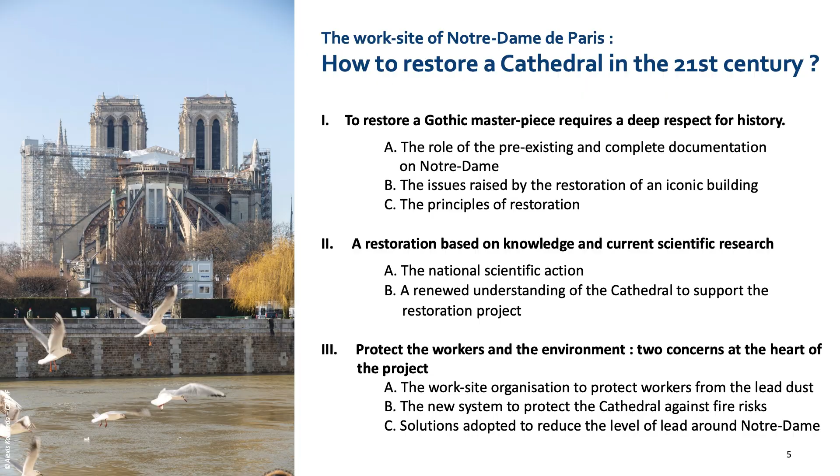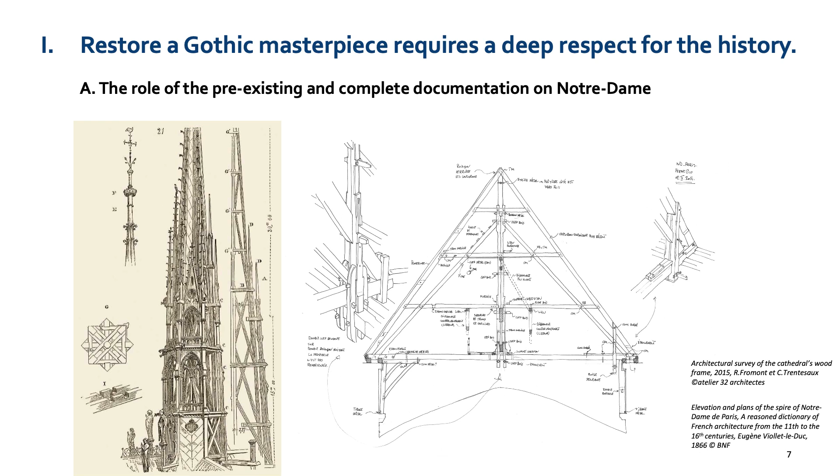First, I will explain that restoring a Gothic masterpiece requires a deep respect for the history. 4 years before the fire, 2 young architects decided to realize a study about the old wooden structure of Notre Dame. Every part of the structure, as you can see in the picture, even the spire, was described by this team. That's why all the structure is very well known.

Actually, before the fire, Notre Dame was one of the most visited monuments in Europe, with 12 million visitors a year. Why? Because, as the Council of France said at the beginning of the conference, Notre Dame is a very important example of Gothic architecture, one of the oldest Gothic cathedrals, a place where unknown architects decided to improve the technical way to build a house for God. Also, Notre Dame is a national cathedral in France, a place where French history was made.

That's why it was possible and necessary to restore the cathedral as she was before the fire. In a few words, let me talk about the principle of restoration.

First, the project aimed to restore the spire and the roof of the central part of the building as it was designed by Viollet-le-Duc. We will use dry wood and lead to realize this structure, and it's a real challenge, because Viollet-le-Duc, the architect of the 19th century, designed a very complex structure which was able to resist stormy weather, for example.

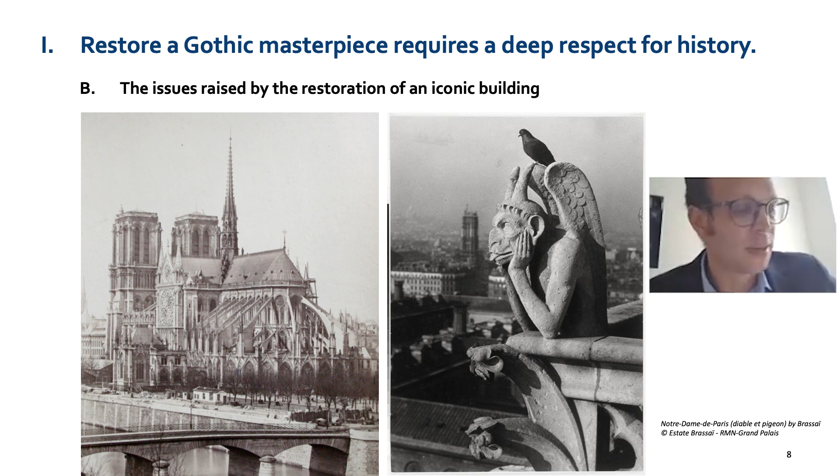This is also a real challenge to rebuild the spire because the spire is also an artistic item with a lot of copper and lead sculpture. The project also aims to restore the Gothic roof in wood and lead. The Gothic roof was installed above the nave and the choir. In this part of the cathedral, we will avoid rebuilding the wood frame realized after the medieval period, because we are looking to simplify the design of this part of the roof.

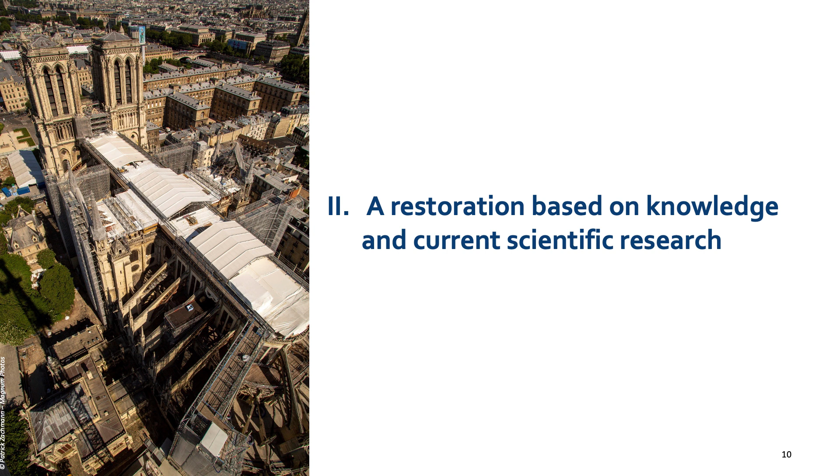A historical building has to be linked with some scientific studies. And we have a real chance in Notre Dame because we have a specific project, the National Scientific Action. The fire

turned a new page in the history of the cathedral. And it was the beginning of a privileged moment for the observation and study of the monument, which is now a site of global and holistic studies.

That's why a national scientific action coordinated by the Ministry of Culture was launched in 2019. This national scientific action considers recovering the knowledge about the architectural elements and materials before the fire, extracting and saving the scientific information contained in the remains, but also coupling modeling systems for geometric, structural, and acoustic studies.

The scientific action comprised 157 research staff from 50 research units organized around 8 working groups. We have working groups about wood, but also about metal, stone, glass, structure, acoustic, heritage, emotion, and digital data.

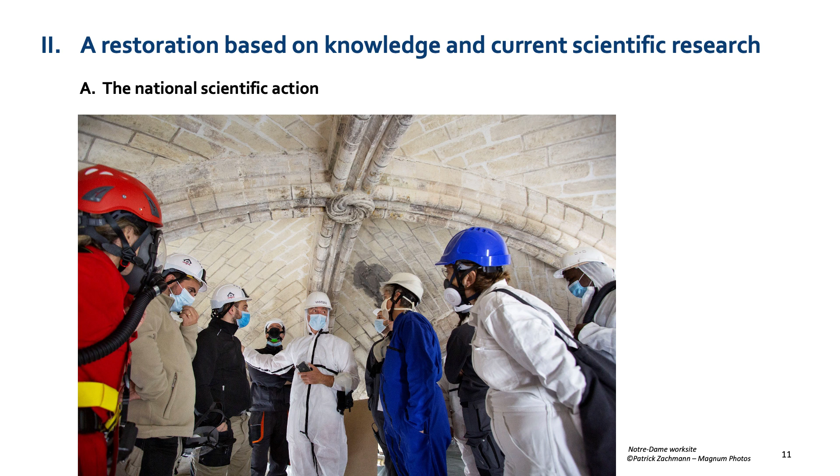And with the help of this national scientific action, we have a brand new understanding of the cathedral. This work is a way to improve our knowledge of the cathedral, but also to get a better restoration project. The scientific action is a way to have a better understanding of the cathedral's history.

For example, we are going to realize a huge study about the stained glasses of the cathedral, and we are going to understand that they are older than we thought before the fire. With the help of the scientists, it was also possible to choose the better stone for the project. And now, you have a picture of the stone here. And now we are excavating the new stone, to be ready at the end of 2022.

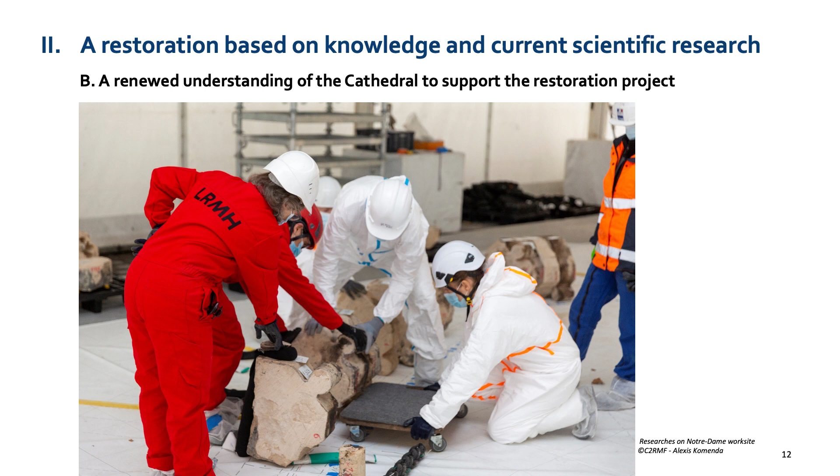But the scientific action also raises issues that are very important for the restoration project. For example, scientific action improves also our knowledge about structural issues, which are very important to rebuild the vault. We have a special worksite organization to protect workers from the lead dust.

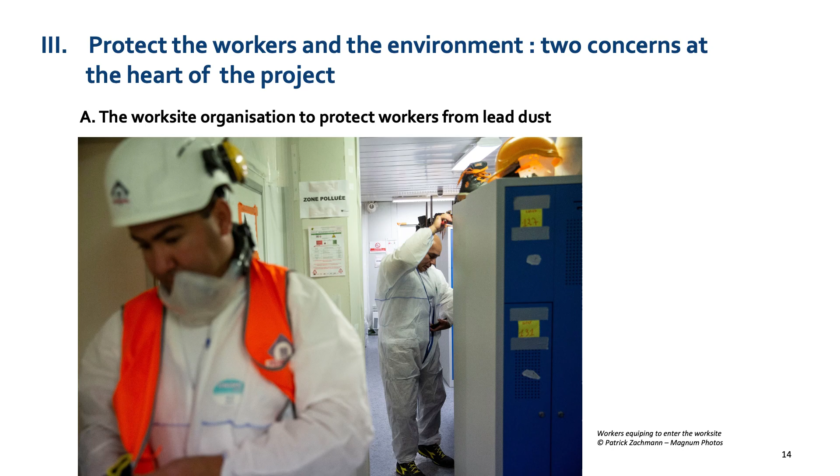During the restoration project, we have to deal with this risk. I think Pascal, you're going to start from a rather different and unusual perspective. So let's hand over to you, and thank you very much for joining us.

Okay, thank you, Timothy. Thank you, Jonathan. You answered maybe all the questions already. Good evening, Excellencies. Good evening, everyone. I'm very impressed to speak in front of over 300 people. So I'm Pascal, I'm a quantity surveyor. I currently advise the client, Notre Dame de Paris, the French government, to advise him for the budget.

I'm going to show you maybe a synthesis explanation of Jonathan and Mr. Le General. April 2019, Notre Dame de Paris caught fire, and the roof and most of the centuries-old roofing timbers disappeared in the flames. From these pictures, you can see the extent of the damage. The wood frame is burnt, and as the spire fell, it burst the stone vaults. Fortunately, the stained glass windows were spared from the flames.

However, the tons of water used to extinguish the fire caused the floors and walls to flood. Lead dust from the burned roof structure has become embedded in the stones and the floors, which means we have to very carefully clean all the facings, all the while being extremely cautious and taking reinforced protective measures.

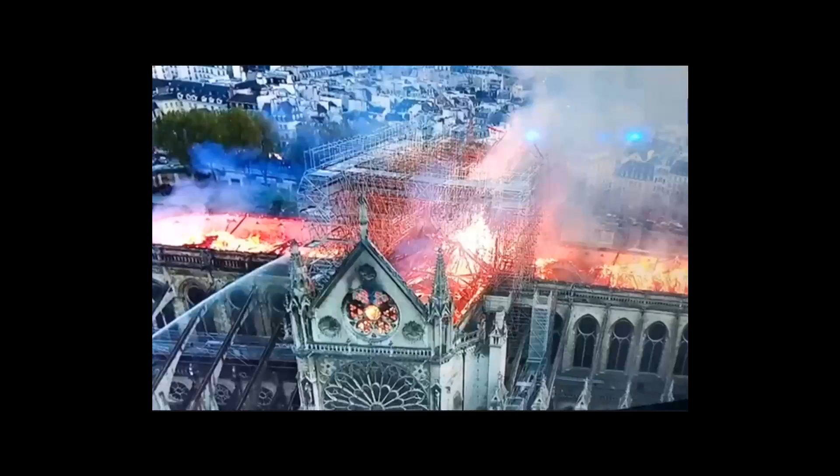Immediately after the fire, safety and clearing work began. The scaffolding that was in place at the crossing of the transepts had to be dismantled piece by piece, using cranes up to 80 meters high. This extremely dangerous and delicate work was completed in November 2020.

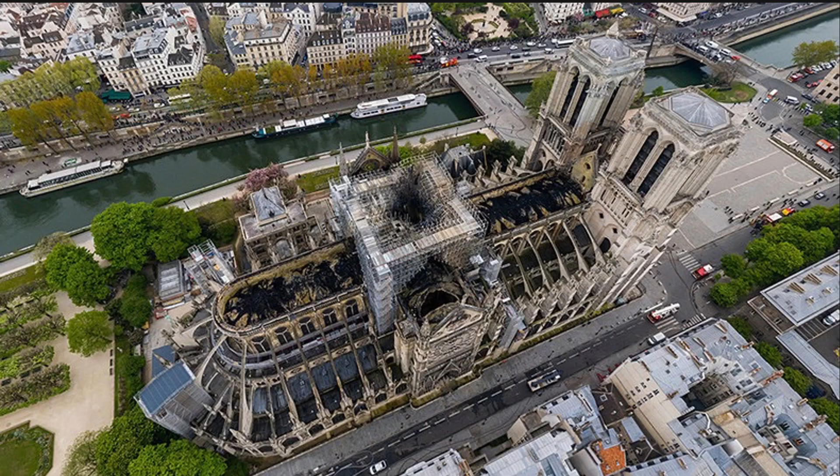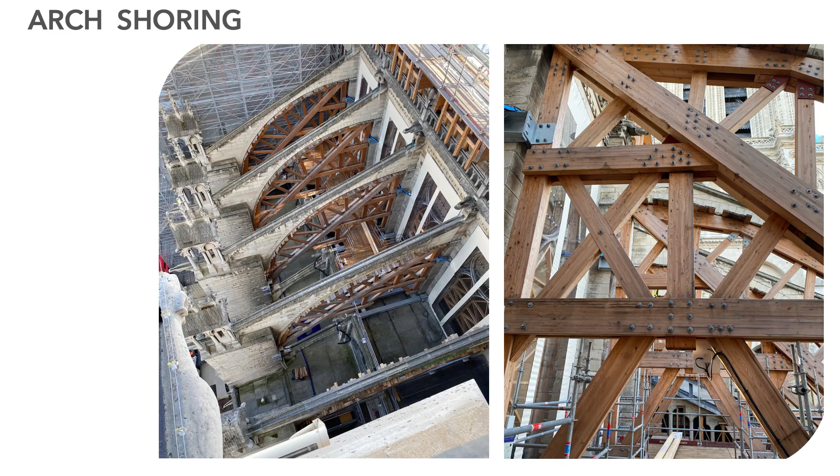It was during the night, yes, the next morning after the fire, we saw the damage. We put up an umbrella to avoid the bad weather. As I said, shoring was put in place to consolidate all the arches, as we already saw in the Jonathan presentation.

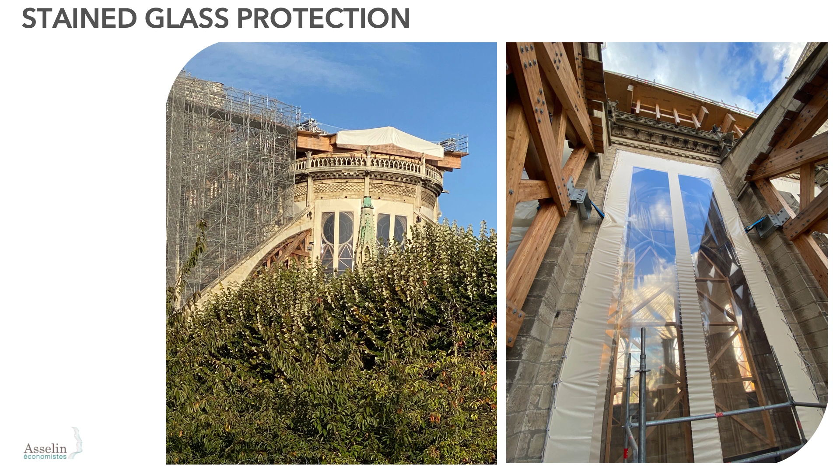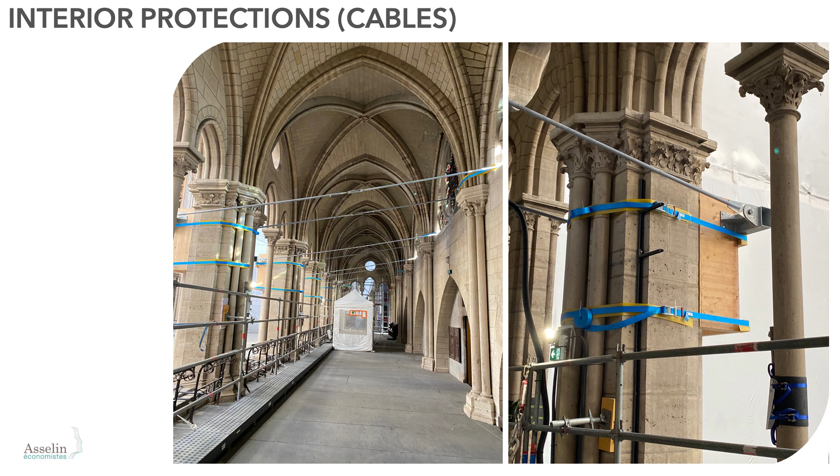As you can see, all of the stained glass windows were dismantled and protective coverings and shoring were installed on the windows. Inside, protective nets have been installed throughout the cathedral. These measures prevent stones or chunks of wood from falling on the workers. All of the pillars have been linked together with cables, which helps prevent the walls from moving apart and helps strengthen the building.

As you can see, we are now in the upper part of the cathedral. Here we see large beams and a floor that allows workers to hang from the underside to remove pieces of wood that have fallen on the vaults. It also allows workers to avoid stepping and putting unnecessary weight on the upper surface of the vaults. On this picture, you can see the general organization.

The health constraints due to the presence of lead and COVID are also very strict. To enter the work site, you must strip down, put on disposable underwear and coverall, and then take a shower upon leaving. This protocol is the same for all the people who are working on the site.

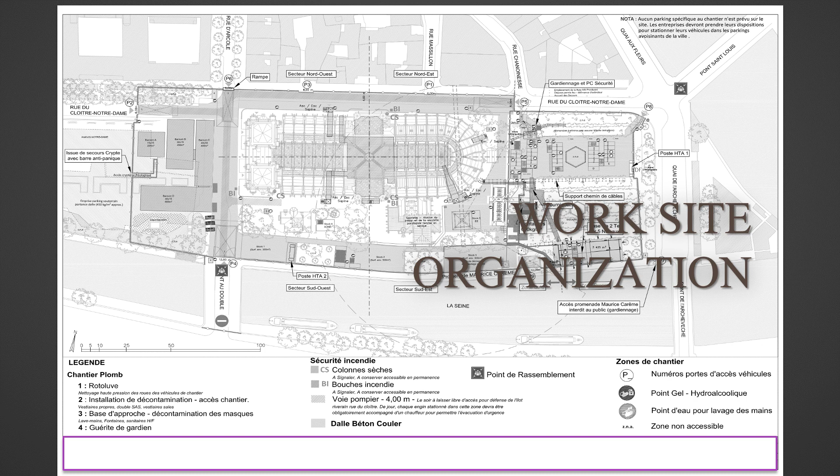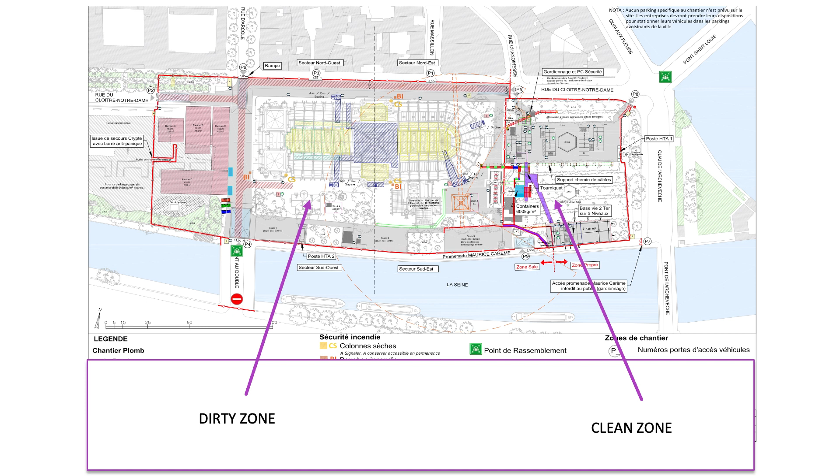The periphery of the cathedral is protected by a sheet metal wall 4 meters high, fitted with checkpoints and cameras. The first area is considered a clean zone as it was not contaminated by lead, while the second is considered a dirty zone contaminated by lead. In this second zone, you have to strictly respect the health constraints.

On the site, we also have a team of 30 architects, 15 engineers, and 4 economists regularly present. In addition to these technical specialists, we have about 25 people for site security, as well as 15 government technicians.

Finally, you must add scientists to study the digital aspects, for example anastylosis, or dendrochronology specialists, who study the nature and dating of old stones, wood, and timbers.

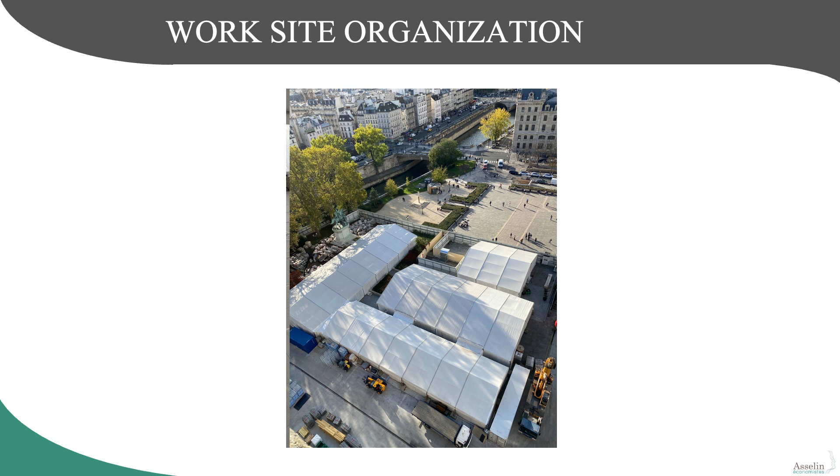When the site is at full speed, there will be close to an average of 300 workers. All the buildings around the site serve as offices, changing rooms, and showers for all workers on site.

For the renovation phases, the choice made for the restoration is for it to be identical. The roofing will be made of lead, and the framing of the spire will be redone with oak timbers. Obviously, the fire detection system will be reinforced and fire-rated partitions will be integrated into the framework.

The areas of collapsed vaults will be redone in stone and the painted decoration restored. The same goes for the stained glass windows, which will be restored and put back into place. Obviously, the electricity and heating will be completely redone.

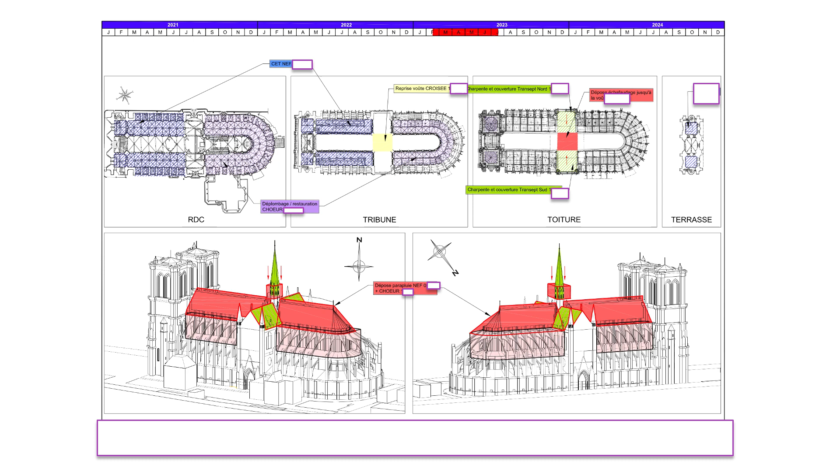Now let's focus on the works that will begin in 2022 and which represent the most delicate part to restore: la flèche, the spire. This work has been broken down into 9 steps.

As you can see, we will start with the work inside the crossing of the transepts. Steps 1 to 5: we start by installing a metal floor on which scaffolding will be mounted.

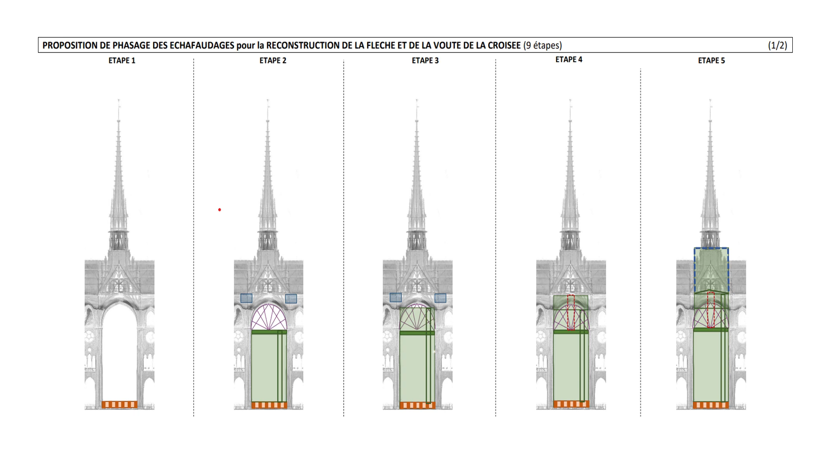Then a second floor will be placed just below the vaults which have collapsed. Shoring will be put in place to make the area safe, and then the scaffolding will continue.

Step 6 continues with the assembly of the scaffolding up to the top of the spire, with an elevator on the right. Step 7: put in place the new oak frame, and then cover it with lead.

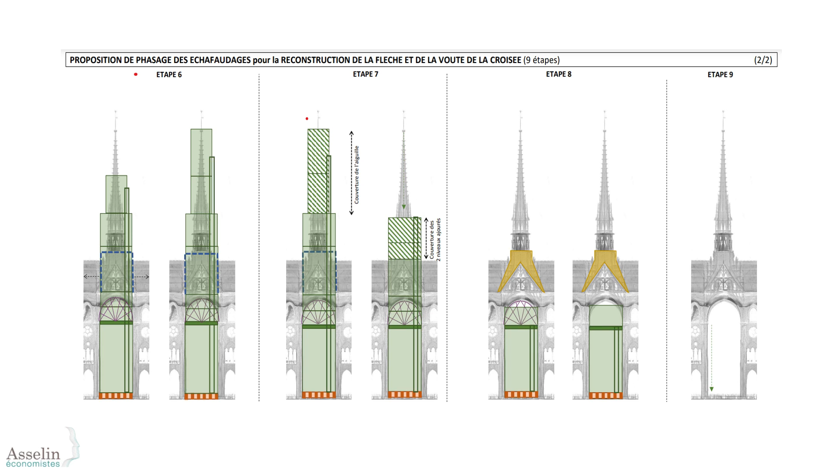Step 8: dismantle the scaffolding, close the vault, and remove the shoring. Step 9: we can hold the Easter Mass 2024, or maybe, certainly, I don't know yet, the Christmas Mass.

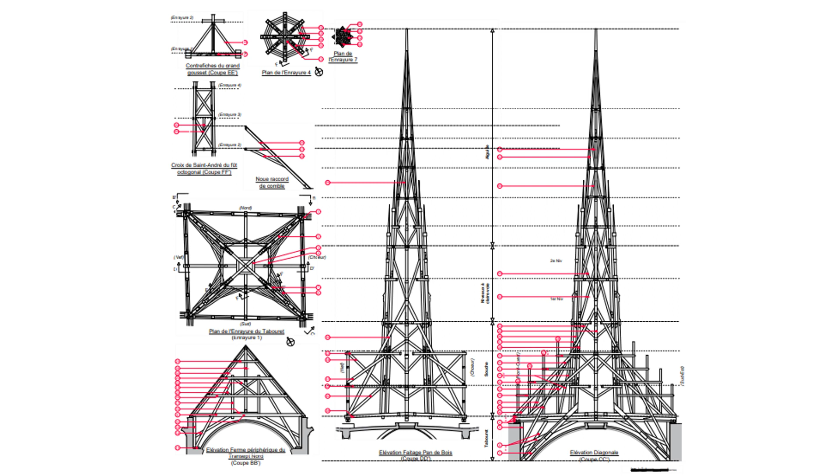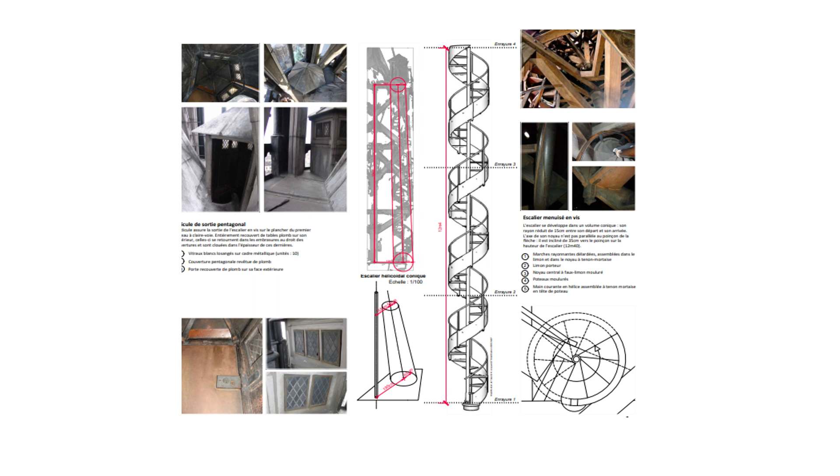Then the spire and the transepts will be covered with lead. We will also put back the statues of the apostles, which had been taken down just before the fire. To complete the restoration of this area, the vaults will be rebuilt and the original paintings will be redone.

Then there will be the 2 gable walls on either side of the transepts, which suffered greatly during the fire. You can admire the quality of the sculptures that will be redone, as well as the stained glass windows.

There you have it, the zones that will be completed by April 2024.

In conclusion, emergency work, including securing the building and clearing the rubble, has been completed. The full diagnosis for the restoration was completed in December 2020, and during 2021, calls for tender have been launched for the reconstruction of the framing and roofs.

The reopening of the cathedral, as we told you, is scheduled for April 2024. However, the full restoration will not be completed before 2035.

Currently, a few words about the budget. The budget spent on emergency and cleaning works amounts to 165 million euros. The overall cost is estimated for the moment to be between 500 and 700 million euros, which includes damage caused by the fire plus overall restoration. And of course, you must add some VAT.